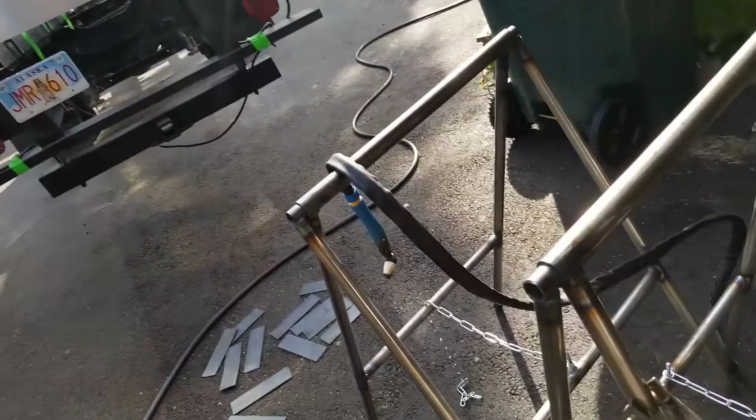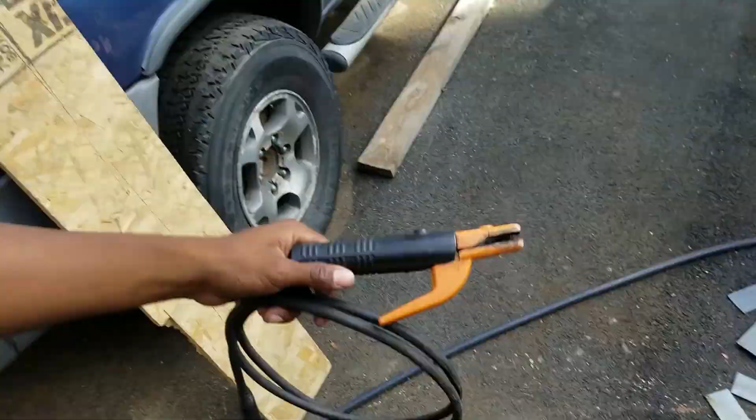The only real drawback or concern I have is the length of the electrode lead and the ground. So if you look here, that's all the length you get on the ground lead. And over here, you don't get very much on the electrode holder either. This is the little coil of the electrode holder, I'll drop that out. Hold this, about head level.

Maybe 7 feet of lead for the electrode. I think that's kind of ridiculous to be 7 feet away. I guess you could weld 14 feet if you stretch it out and have it right in the middle. That's just way too short. But that's really the only gripe I have with this machine.

Plasma cutter works good, I just cut down a bunch of stock for the truck. The stick welder definitely works, I've used that a lot. I can't really TIG weld that well, but the machine does TIG weld okay.

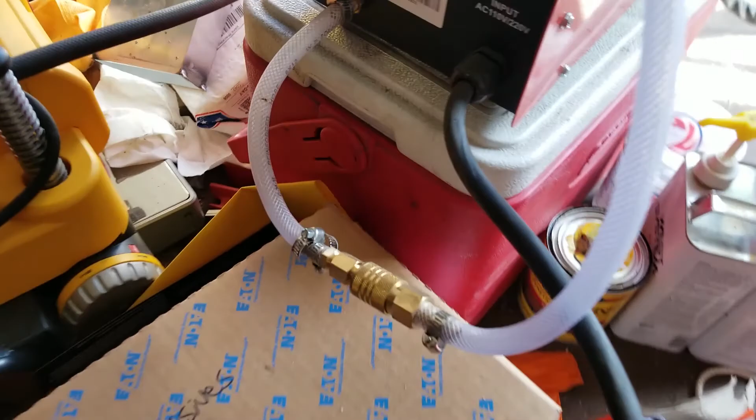The other connectors I'd think about getting, if you plan on getting one of these, is I made this little quick coupler right here. Hang on a second. It has the same line going in for the air, for the plasma cutter, as it does for the argon when you're TIG welding.

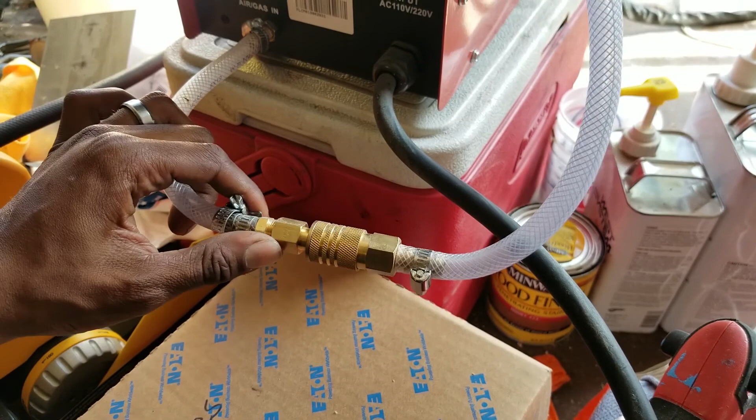I just got some air compressor fittings and they work good. I put one on the regulator that they give you, and you can just undo the little quick connect, then plug in the other line to your argon supply, and you're off TIG welding.

It does come with the pedal. Like I said, I'm not very good, so it just sits there.

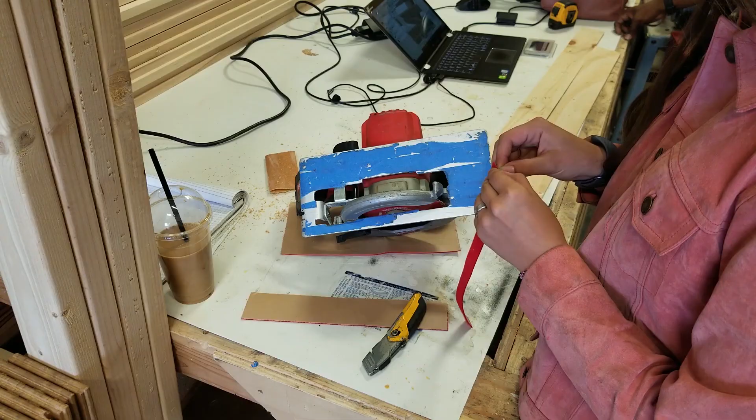Cutting aluminum isn't super difficult, you can just use normal wood cutting blades. It does dull them a lot quicker than wood would though, so make sure you have a few spares on hand. Something to take into consideration is that aluminum does not like sliding against aluminum.

It gets kind of grabby. Our cordless circular saw that we were using to cut aluminum has an aluminum base plate, which was making it a pain to cut with. Our temporary solution was some sticky felt sheet from a craft store, cut into strips.

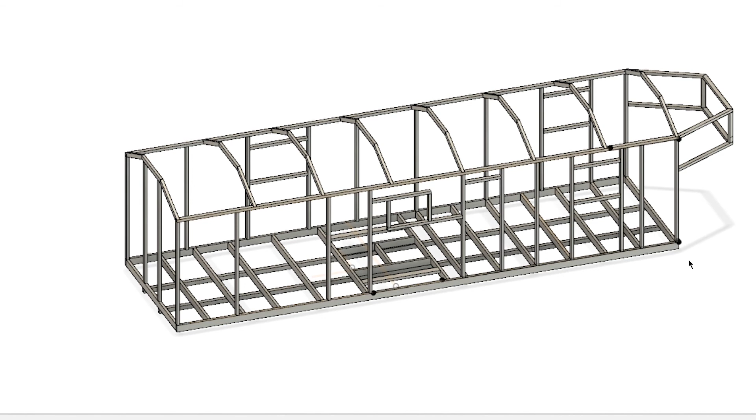We haven't put this out there yet, but here's our plan. Kima drew this in Fusion 360 from scratch. This whole project has been from scratch, and it's been crazy to see the progress we've made on it. So many people have given us great advice, and lots of people have said we must be nuts. But overall we've had more support, and honestly I expected more people to say we lost it.

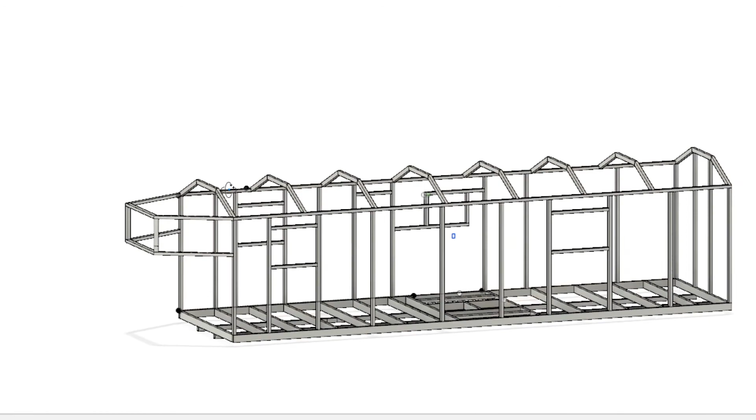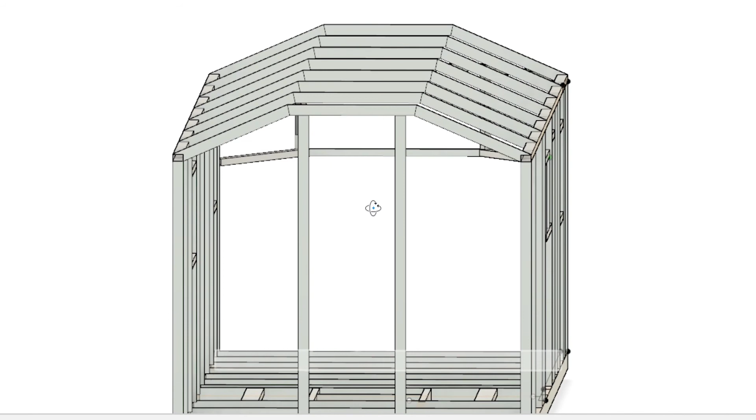The angle on the roof was a little tricky to try and guess or cut out by hand and get right, so we wanted to make sure it was the right angle - not a right angle, not 90 degrees, it's its own specific obtuse angle. We wanted to get that angle right, so we took it to the CNC and made a template out of wood, then traced that template onto the pieces of aluminum we actually made the roof from.

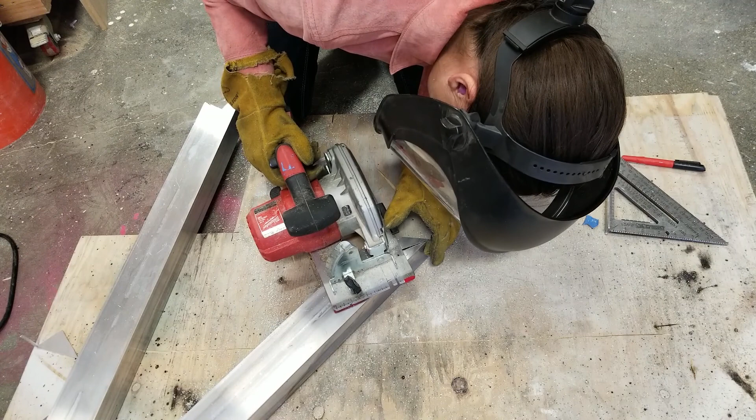So as per usual, we've messed something up. This is what happens when you work tired.

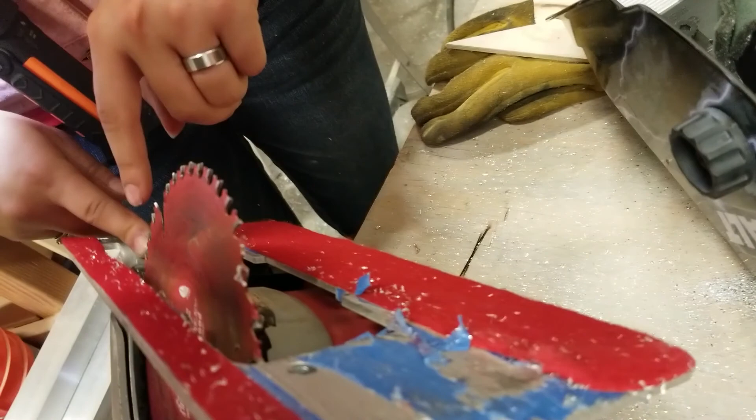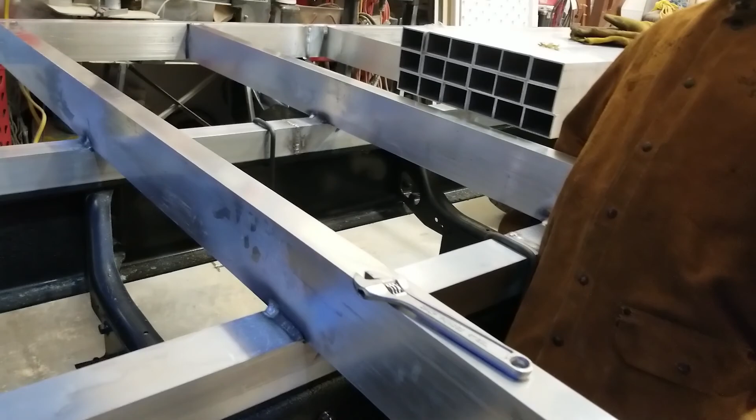So what'd you do, Kimi? Somehow the line got a small pinhole in it, probably from when I was welding, the spatter landed on the line. It's just a plastic line, so now it has a small pinhole leak in it. You see? So I'm just draining it so I can put a coupler on it, so we can drive home. It's almost 11:30.